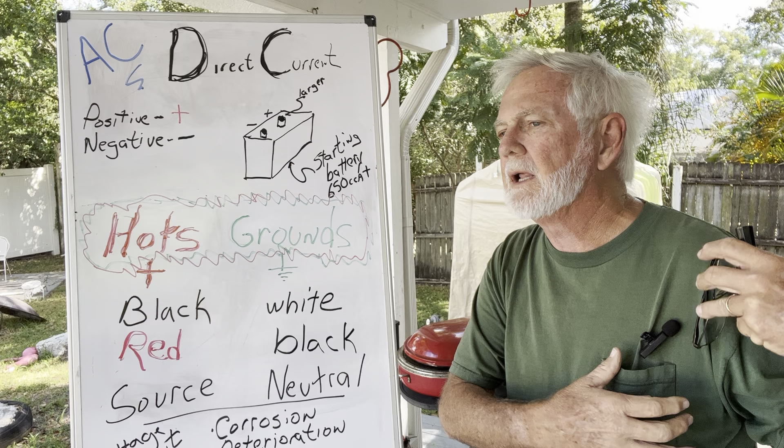For the guys following me daily, I know you're going, come on, I want to do the body pads and the gussets and stuff. I dig it, in the big picture of things it'll be fine. But during this summer season, I really found a lot of folks had problems with ground issues, corrosion, things like that. Also, a lot of you guys call and say, well, what's this wire over here, what's going on here? What I found out I needed to do was go back to some basics and handle those, then get into what the problem is.

So what I'd like to do on this video is talk about a couple of basics. Now I know you guys that are advanced go, oh man, here we go, let's not go watch this. Hold on, you may learn some things, you may see some things that maybe you always had questions of, because I want to try to answer a couple of those questions right now.

Okay, now it's kind of scary, you've got somebody that's left-handed and dyslexic trying to tell you how to go left or right, right? Anyway, that's what I want to do here a little bit, right?

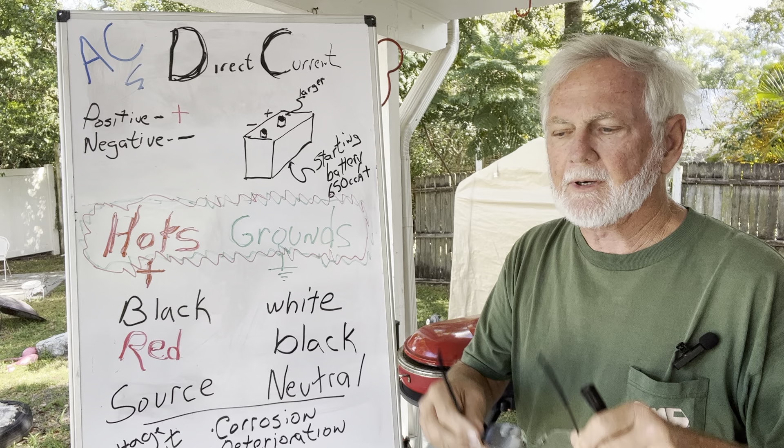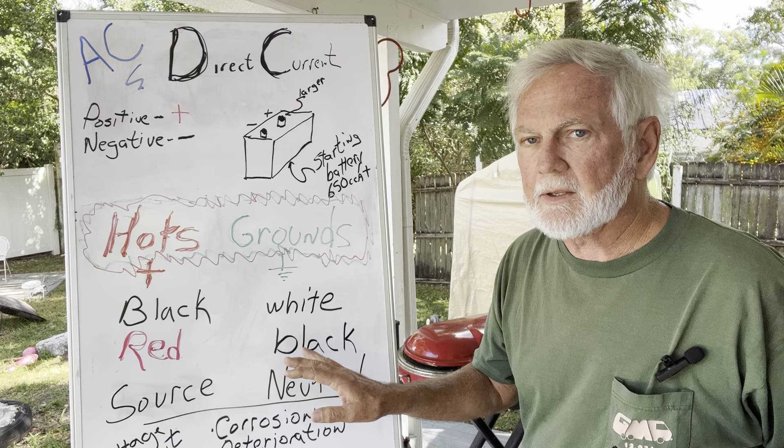Now, we're working with DC, direct current, okay? There are two basic things you've heard in life: DC, direct current, and AC, alternating current. Well, today we're not going to talk about anything about alternating current. No, sir, we're not going to talk about Tesla or all the cool stuff they did. We're gonna talk more about Edison and DC circuits a little bit.

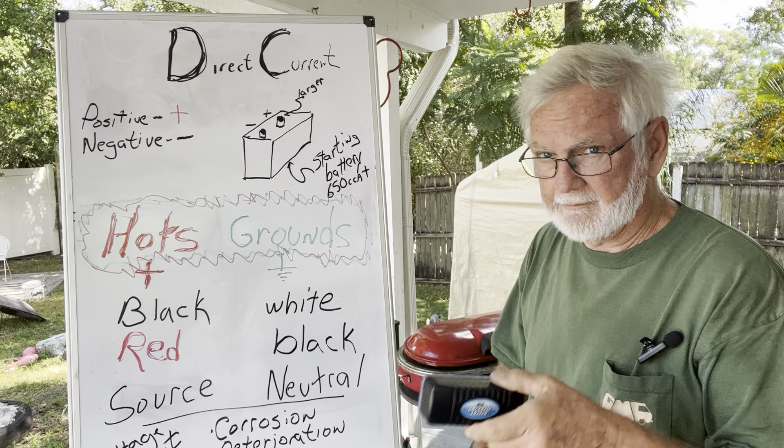Now, your coach has two 12-volt electrical systems. It has a living area and it has an engine electrical system. And it has one AC system, whether it be from your generator or plugged in. We're not going to talk about any of the AC systems at all. We're going to talk DC, direct current. Your main static direct current source, of course, is your batteries. Boy, I'm getting deep, right?

And your battery has a positive and a negative on it, right? And all of your engine electrical system batteries will be up front, okay?

There's a boost solenoid. I was going to bring one, but that's okay, we're not going to even talk about it. But down as you pull up your passenger front hood, there's a boost solenoid. It's a silver cylinder, about 1.5 inches diameter, about 2 inches long, and it has a copper lug on each side of it. Okay, that is your boost solenoid.

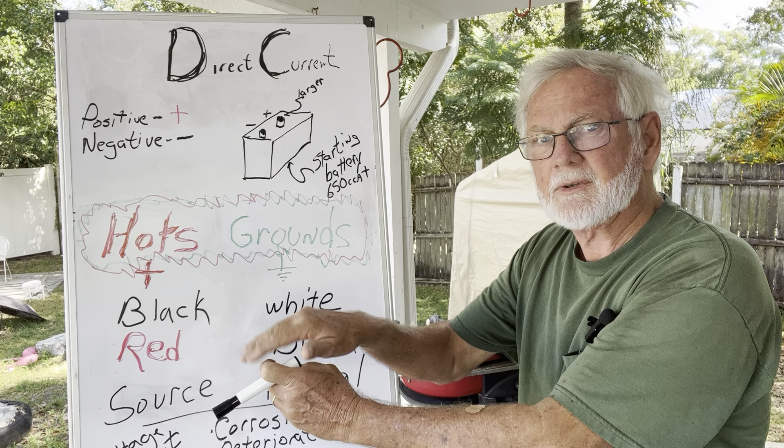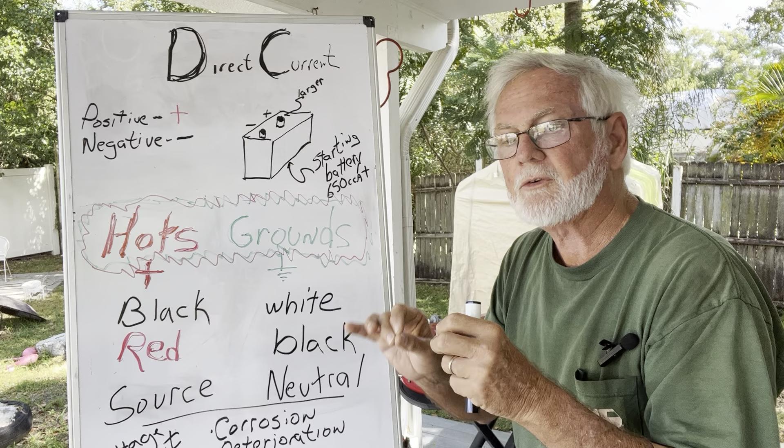Not to be confused with a Ford starter solenoid, which has a black plastic case and a silver top. It does have two things out the side, and it does have two terminals in the front, but it is not a boost solenoid, it is a Ford starter solenoid, but it also supplies the coil during start voltage and blah, blah, blah, blah. That is not what we want in this application. We want a boost solenoid.

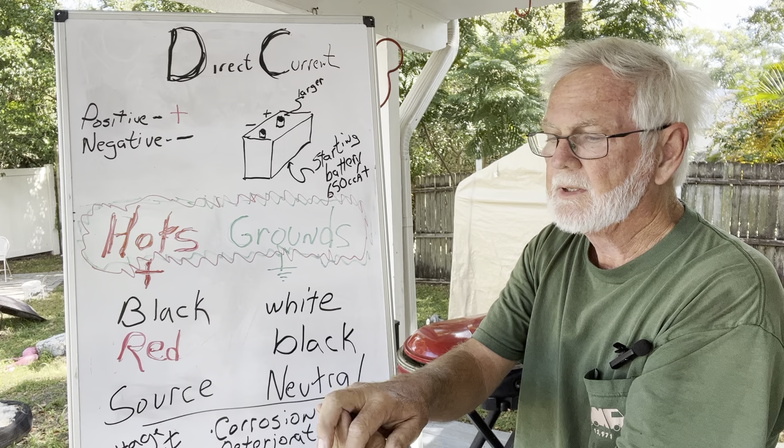So when you look at your boost solenoid, on the left side, all those wires going to that big terminal, is your living area electrical system. And the one on the right is your engine or starting battery electrical system. Your starting battery will be connected with its positive to the right-hand side, kind of looks like a cartoon character, but this battery, one way or the other, will be connected here. Now, this side is your living area. We're not going to talk about it right now. Well, we are, but not for purposes for a few minutes. So here's the deal.

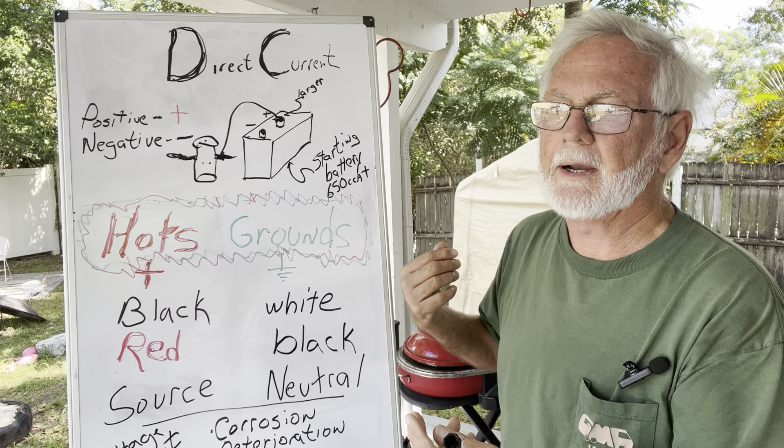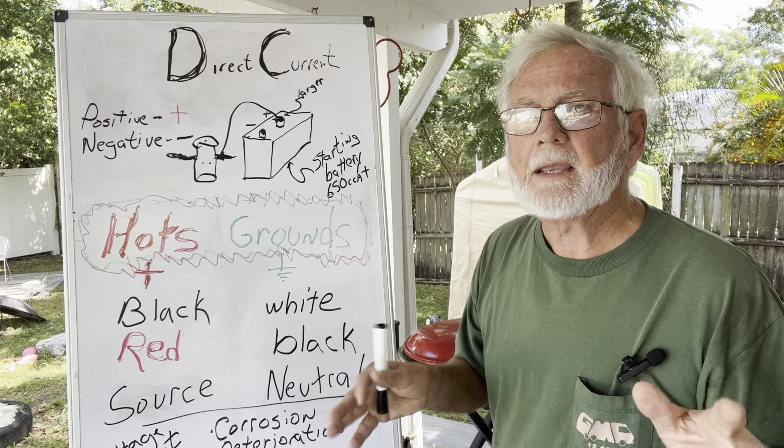There's a theory called the Holes, H-O-L-E-S, theory of electron flow. Electrons flow - supposedly the holes of where the electrons are supposed to be - flow from the negative terminal to the positive terminal because they're trying to get electrons. That flies in the face of everything that you and I think we know about things, because power is supposed to flow from positive to negative. Well, honestly, in DC circuits, think of it that way: think of your ground as negative, and think of your positive as your voltage.

Hots and grounds. Now I'm going to confuse you a bit, but stay with me. Whenever you look inside your coach, your wiring, your wad, I'm going to talk about GM floor plan coaches, and relate it to what small differences there are in the Royales.

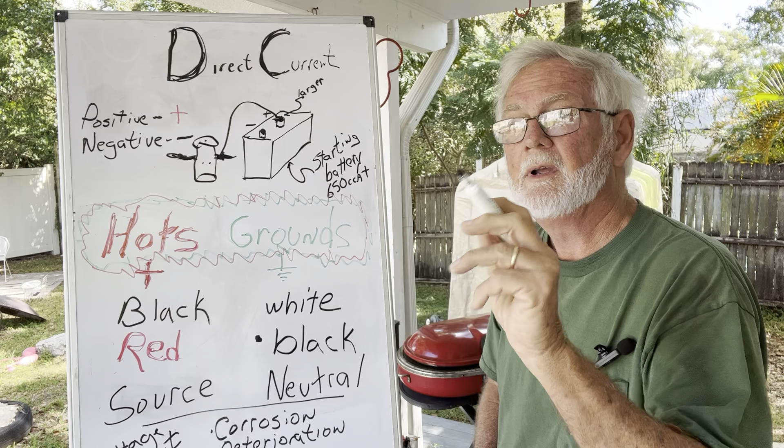If you look in your dash, the black wires are going to be ground, except for the ones that aren't. There is a black positive wire going to the fuel selector switch. On top of the fuel selector switch it's black, but it's actually a hot wire. When you push the fuel selector switch, that black wire gets hot to energize the fuel solenoid.

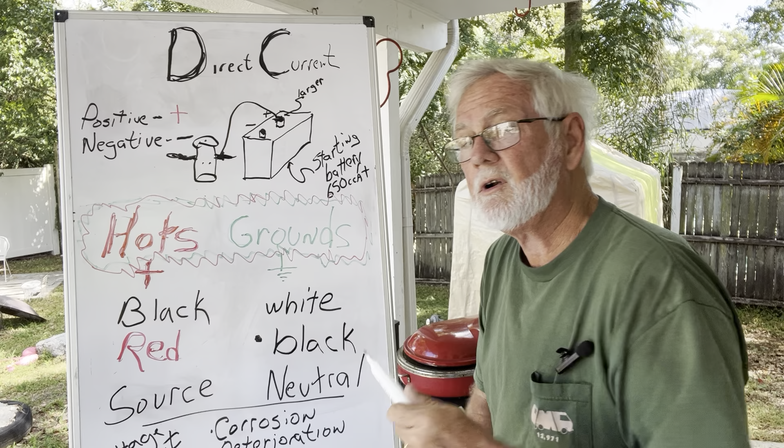But in general, automotive and your GMC, because it was built in the automotive industry, black wires are ground. Your primary wiring, the big stuff that holds current, like to your starter or from your alternator, will be red, unless somebody did their best and didn't have any heavy red wire and used black instead. Generally speaking, in automotive applications, primary power wire is red, and primary grounds are black.

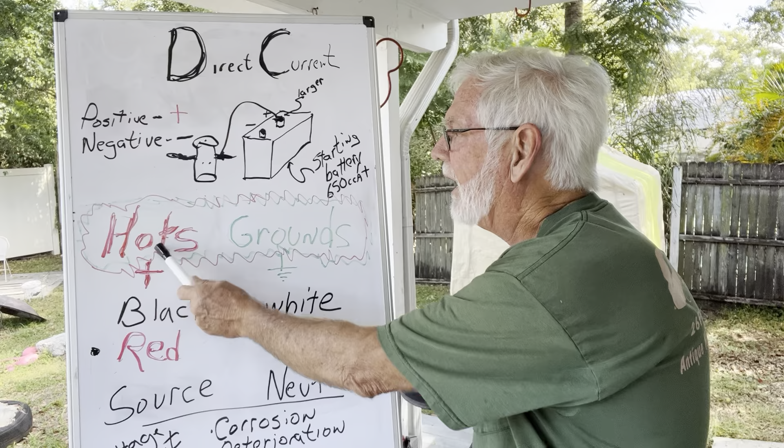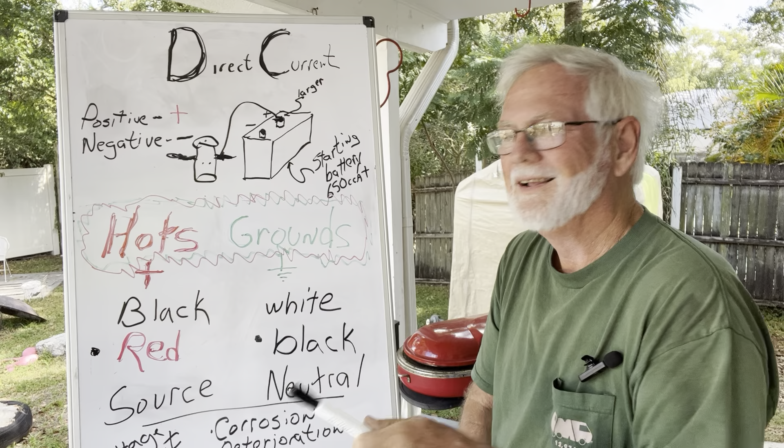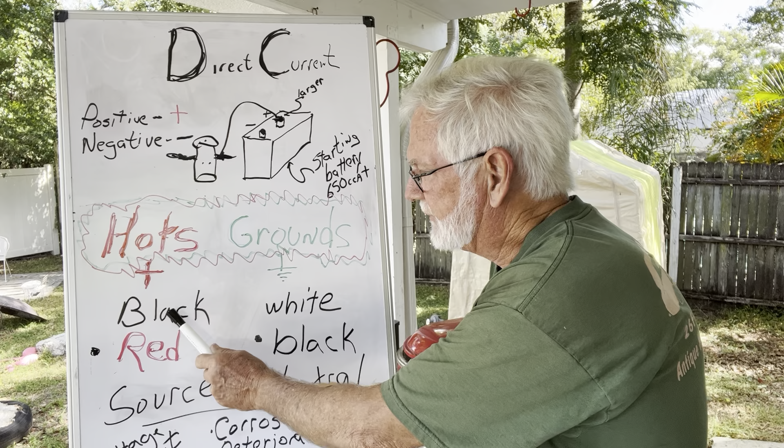If you are a journeyman electrician - my brother-in-law was one, and I had him working with me - we had philosophical differences, because in the home electrical AC world, black wires are hot, or your load, and white wires are ground, except for the ones that aren't. Generally speaking, in a house, a white wire is called a neutral wire, and the black wires are source wires for 110. So right there you can see a problem.

In the AC world, black is hot. In the DC world, black is ground. You'll buy some appliances, 12-volt lights from China, and they'll have white as ground and black as hot, because whoever designed it was thinking of home use. Even though it's 12 volts, they still carry it over, and white and black are wired like houses.

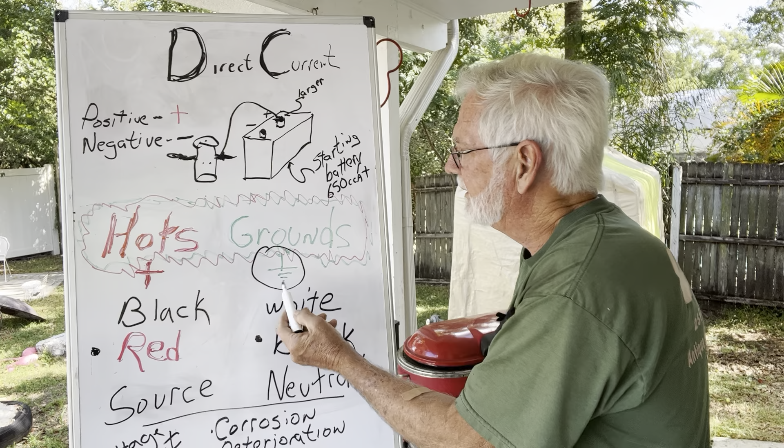Generally, if you look at a drawing, greens are going to be ground, and you'll see this little symbol - that's a ground - and of course you'll see a positive symbol.

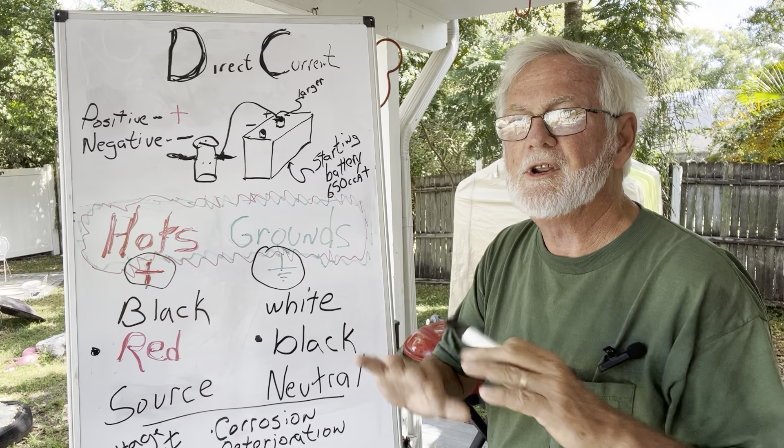Your coach is full of 50 years of good intentions. But if the guy was a journeyman electrician, it could have been wired this way - not because he was an idiot, just because he was taught color codes differently. I was taught DC circuits - black is ground to me, red is hot to me. I was not trained in AC circuits. So until I understood this, I was wiring AC stuff like DC stuff. It did work because it's just a passive circuit, but the color codes were wrong.

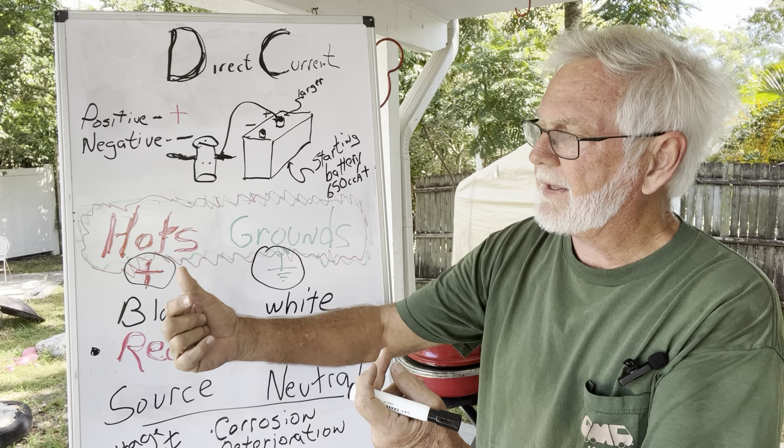On a Coachman, on a Royale, in the living area electrical system, usually under a sofa or behind something or in a cabinet, they really hit them differently. You'll see one terminal block with a bunch of white wires going to it. On Royale or Coachman or many transmodes, when you look at the living area 12-volt electrical system, all the grounds are white. They didn't have separate grounds to every light or whatever in the 12-volt system - a ground and a hot. So you'll have a white wire to a switch, then a blue, a green, and a yellow - that's three circuits, but they all use the same ground.

So the 12-volt electrical system in a Royale is a discrete circuit, meaning it has its own ground path. In a GM floor plan coach, all the grounds are common and tied to the chassis, like in a car, because the guys that designed this are automotive guys. Generally speaking, they're black wires, but the harness doesn't have a separate ground wire - they just ground it everywhere.

The next video I'm going to do will be about meters and how to find that. But right now, what I wanted to talk about is hots and grounds, as opposed to corrosion.

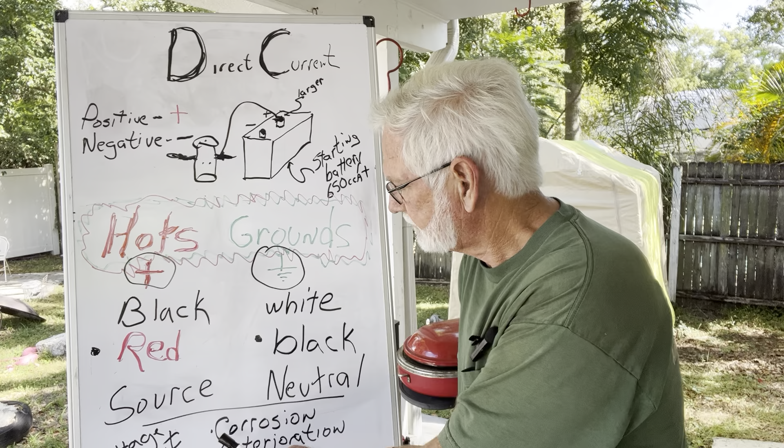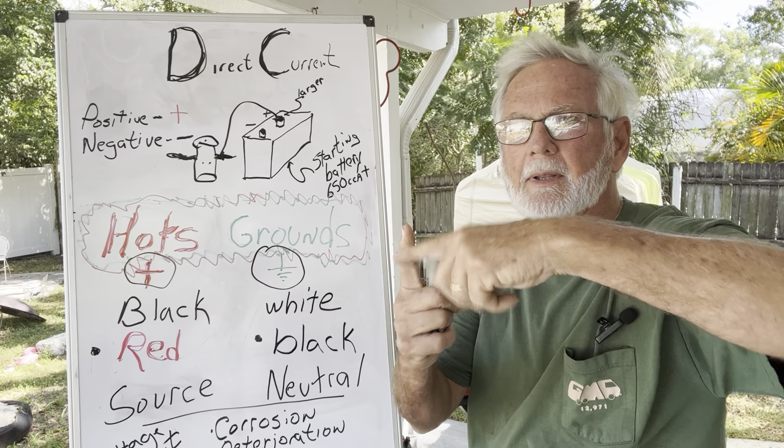Corrosion. Deterioration. Literally, something that's been made for 50 years has corrosion - it's rusted, the metal has reacted to oxygen and developed a corrosion layer. And then there's damage over the years - one wire sitting in one spot for 50 years rubbing against a piece of metal will rub a hole in it. So the three things we're fighting with our motorhome 12-volt electrical system are corrosion, deterioration, and damage, on top of all these different wire colors.

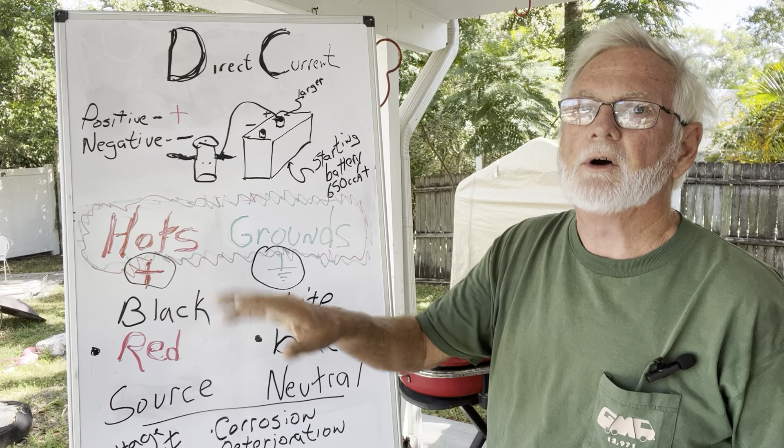The primary wiring in your coach, under the passenger front hood, the big wires - generally speaking, GM had them all red.

Generally speaking, if you want to shut them down, the way most people think - remember we talked about the holes theory - is that if you want to turn the battery off, take off the positive. Bubba, Scooter, their wives, they all think that way.

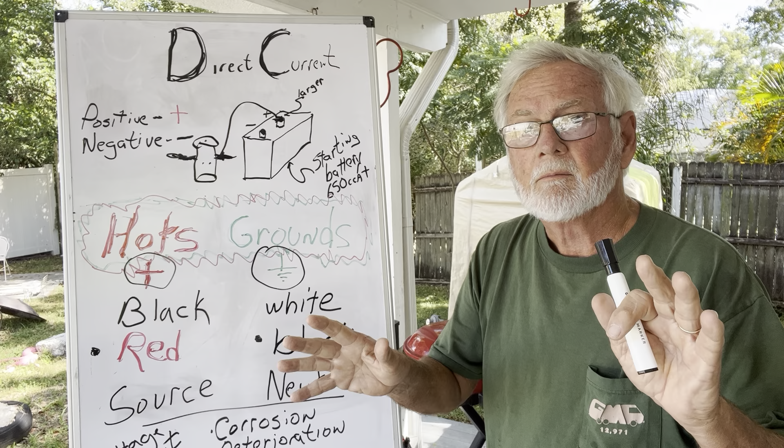And that's good. But you could just as easily do it differently. For professional use, I built ambulances for a year and a half, and Bubba and Scooter would look at an ambulance wiring system and not know what to do at all, because all the switching is on the negative side.

In the holes theory, all the current's at the negative. Well, you don't have a full circuit until you have positive and negative, right? So to be fancy or cool, or to say you knew what you were doing, you put the triggers and your shutoffs and everything on the negative side.

Don't be surprised if you go in your coach and you see a battery switch on the negative or the ground. Not unusual.

Only problem with that, to me - and I do understand it fully - is if you're in Lower Lompoc, and I know there's a place there, so I'm not down on anybody there, but if you're basically in the middle of nowhere and you get in there and somebody needs to help you, or you need to remember something, our brains in America - Americans - our thought of power goes from positive to negative.

I used to build car stereo stuff, and kids would bring their car and say, 'This thing doesn't work. I don't understand it. I used all the big wiring.' Well, they had a large power wire, but they had a little tiny ground wire. It's not going to work because current flows in - you've got to have a full current path, and the smallest wire is your maximum gauge, right?

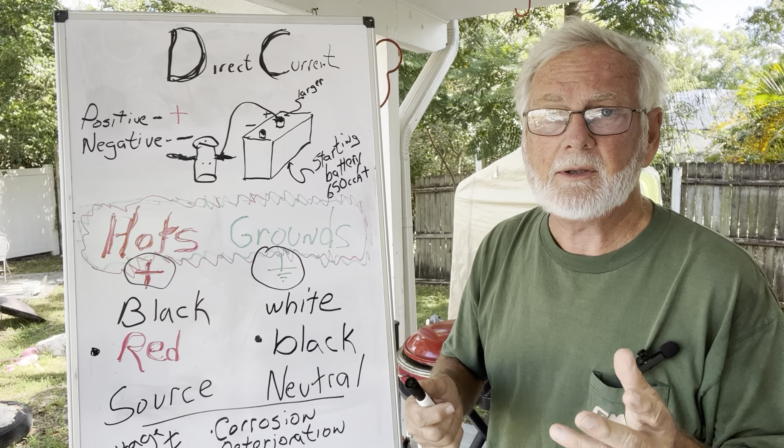I really feel that we need to put the switches on the positive side and ground all the negatives, because that's the way most Americans have done that. And if you get into the problem of what's the circuit - is it a positive or a negative trigger, this and that - I really feel to keep things simple and keep it serviceable wherever you're going to be in the United States, at least, to put switches on the battery on the positive terminal.

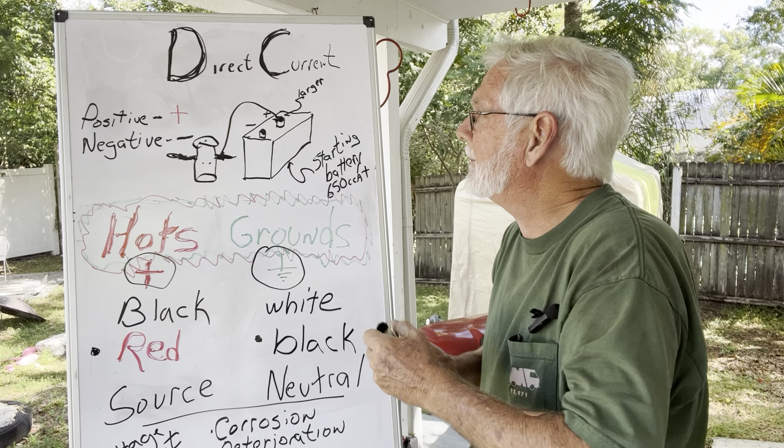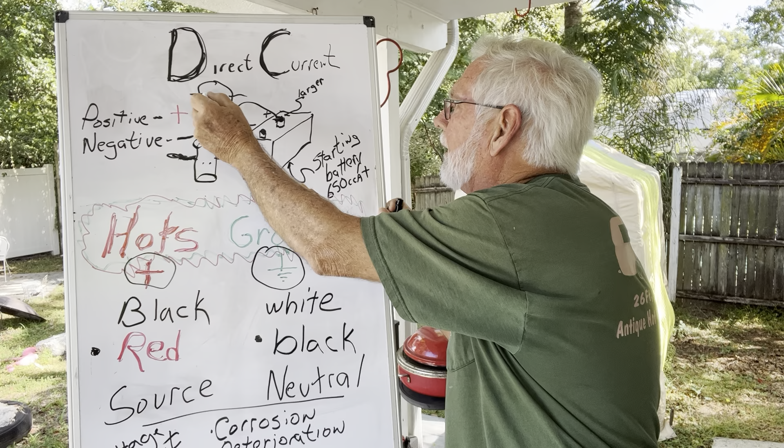Coming off the battery, first thing you do is you go into a switch. The electrical design for a switch is like that - you want to put a switch in to shut the batteries off. No matter what happens, you want to shut off the batteries. So whatever battery you have first needs to go to a switch to shut it down, and because of convenience and understanding the circuit, it needs to be on the positive side.

I said all that to make sure we didn't have any of the electrical engineers call and say, 'Look, we can shut off the negative, I like to do it.' Look, if you like to do it, awesome, super duper. But when we had the place open, we were building things for people that didn't want to remember the holes theory of electron flow and all this kind of stuff. We just put it on the positive side.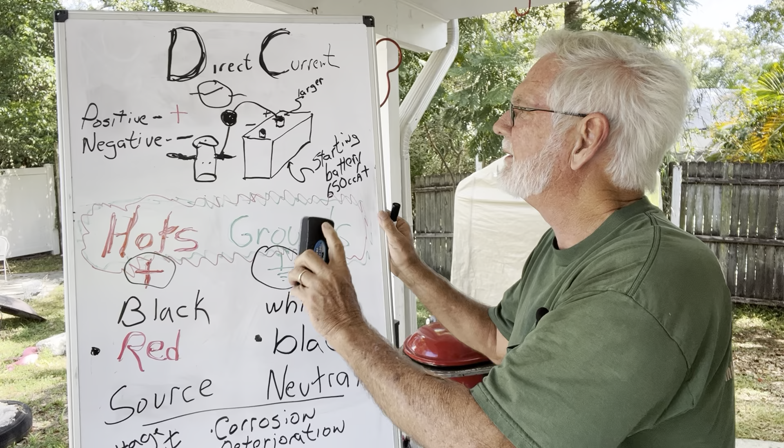Now, all of those large wires - let's forget... I don't want to forget all this, actually I'm not going to erase it right now. All of these wires have lived for 50 years or so in the real world.

All the corrosion - if you're in Florida, if it sits here 6 weeks, it's going to have some mold on it. If you're in Arizona, you know, I've seen the cartoon - the guy, a skeleton in the chair, says 'Yeah, but it's dry heat.'

Heat deteriorates plastic. What does plastic do when it deteriorates? It shrinks. So if you have a holding tank and you look under your holding tank and you see cracks with a bunch of guppy pucky all over it, that roto-molded plastic tank or ABS or some other material - the plastic has reached its half-life and is starting to deteriorate on its own. It's shrinking and it's cracking. So if you're looking to throw good money after bad, continue to try to fix that.

If you want to do away with that and worry about something else, replace your holding tank. We're not talking about holding tanks—we're on DC circuits. What I'm saying is that just from deterioration, your electrical system and corrosion will have problems.

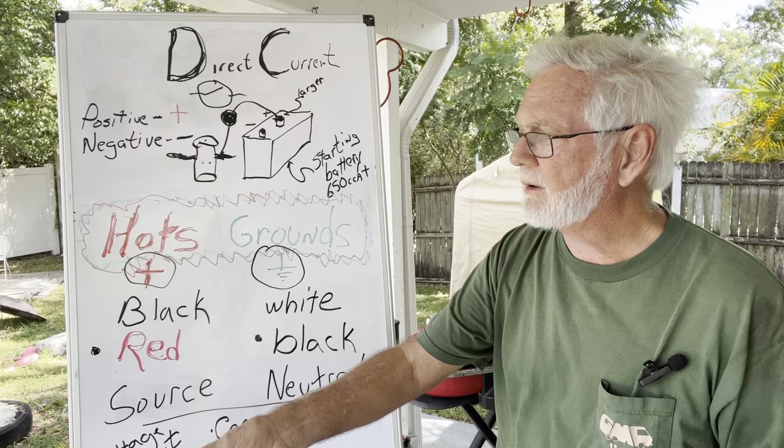Guy called me yesterday. I don't know what happened. I went out there about 6 weeks ago, fired it up, let it sit and run, all this. I haven't moved it in a couple of years. Turned it off, came back out. Now I go to fire it and it just goes click, click, click. Won't start. Battery's good. It had a charger on the battery.

All right, let's talk about that situation. A couple of things. First of all, you've had the battery on a charger. How old's the battery? Because to maintain a battery, you need to discharge it and then recharge it, because it gets a memory.

And batteries have life. You say, well, my battery is 6 years old, that thing's great—run away quickly. Because when that battery fails, as voltage decreases, the amount of current it's going to take to do the same job is going to increase. So when your battery starts to not put out 13.1—by the way, it's not 12.

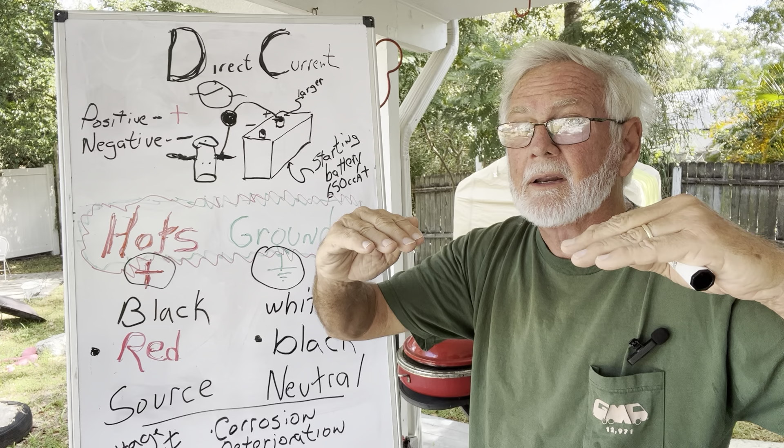12.65 is a fully charged battery. 13.1 is a charged battery with a top charge. So when it won't go up to 13.1, it'll only go to 12.8 or 12.5 or whatever—this battery's starting to deteriorate. And as it does that, the current needed for that battery to do the same job increases, which puts more load on the devices. Lower voltage means higher current, which means more stress.

So when that battery goes bad, it can take some of your other stuff with it, like the memory in your radio, things like that—low voltage. We'll talk about that again when we get on meters. But it is really, really important to cycle your battery.

Now, first thing you said: I kept the battery up all the time, and 6 weeks ago it fired right up. Now I hit it and it just clicks. Could be the battery finally said, I'm tired of this hanging around doing nothing. It may have just said, I'm not doing it. It's very possible—you need to check it.

Put a voltmeter on it and turn the key. Try to start it. If the voltmeter does not drop and it won't start, that means there's a circuit bad. If you hit the key and the voltmeter dives, voltage drops down, that battery is bad. So the first thing I told him to do is take a voltmeter, put it on the battery, and hit the key—does it dive or does it stay up? He said it stayed up.

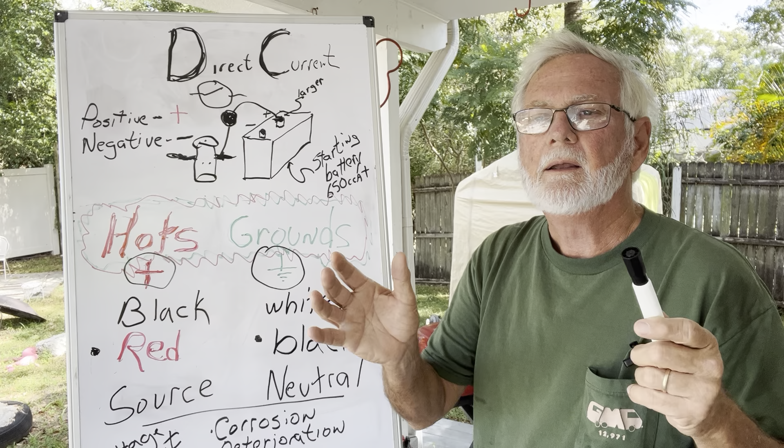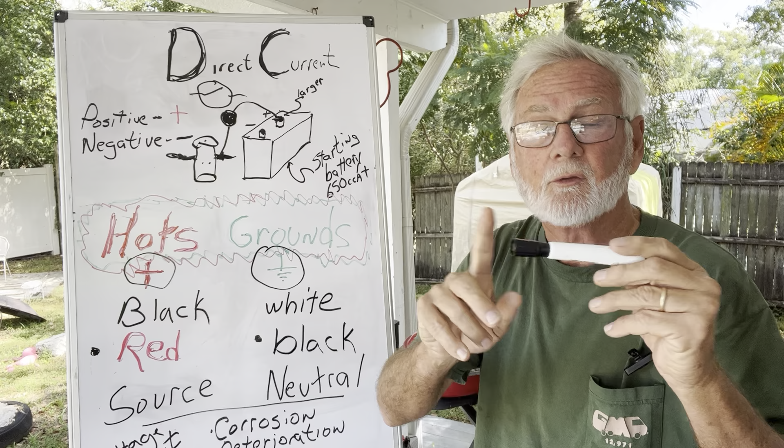What that means is one of these circuits, with all these wires on it, is not transmitting enough voltage to kick the starter, because he's got a good battery. Where'd it go? It went into the junctions of all those big wires, those red wires, 12-volt primary wires.

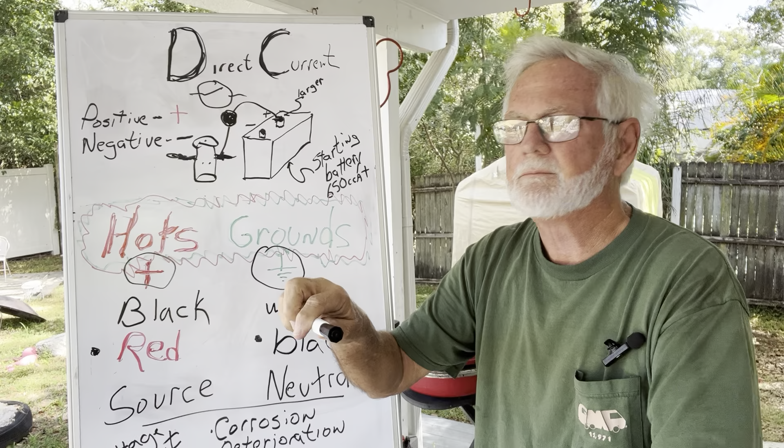What happens is you've got a bolt with 3 wires going to it, and the bolt's down tight, and it works just fine. Well, over years, the metal in those fittings develops corrosion, and it builds up a film—very, very fine, light film. It comes out of the metal. It's not like it's going to encroach into it because it's tight, but the metal itself exudes this corrosion.

What happens? Enough of that corrosion gets between the terminals and it doesn't pass anymore—it won't pass current. You may be able to read voltage through it, but it may not pass current, because the corrosion has built up inside there. Age causes corrosion. We're 50 years old—there's corrosion everywhere on that bus.

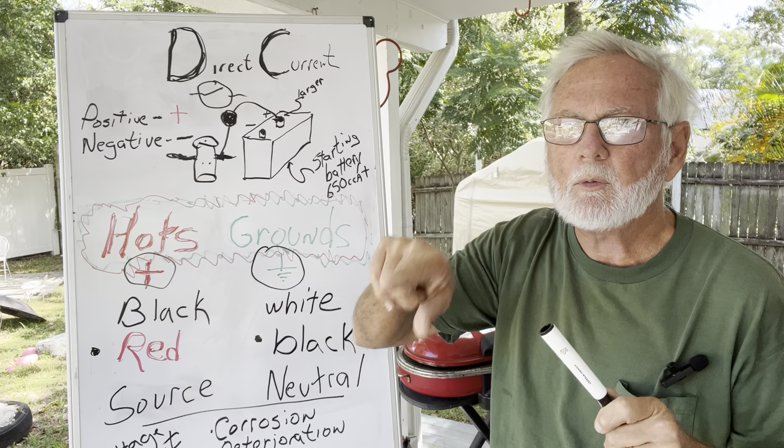Everywhere, right? Simple way: if you have a problem, you turn the key and things aren't working—simple way to do it. Get a crescent wrench, a small one, and go to every terminal where every one of those large wires is. Loosen the terminal a little bit and wiggle the wire back and forth, because doing this with the connector will scrape some of the corrosion away.

Now, if you really want to do it right, take the bolt out, take each one, use some emery paper or sandpaper on it. If you do nothing more than loosen that bolt a little and wiggle those wires around, then tighten it back down. Look at every one of the connectors going to the wires, and be sure they're not nasty or loose.

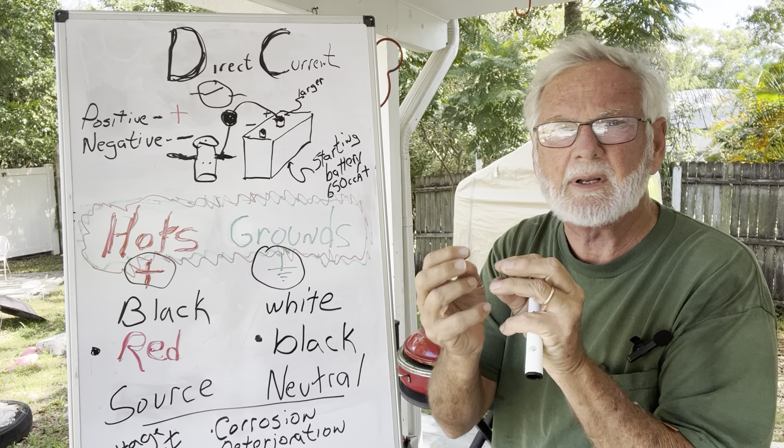You may want to go further. You may want to take the wire off and recrimp it, clean it up, every one of them, and put them back on. On the starter, there's one big wire and one small wire. Clean them both.

Look at the wires. Be sure that over the last 6 weeks corrosion hasn't built up so bad that the wire won't pass current. You might say, wire is just a wire.

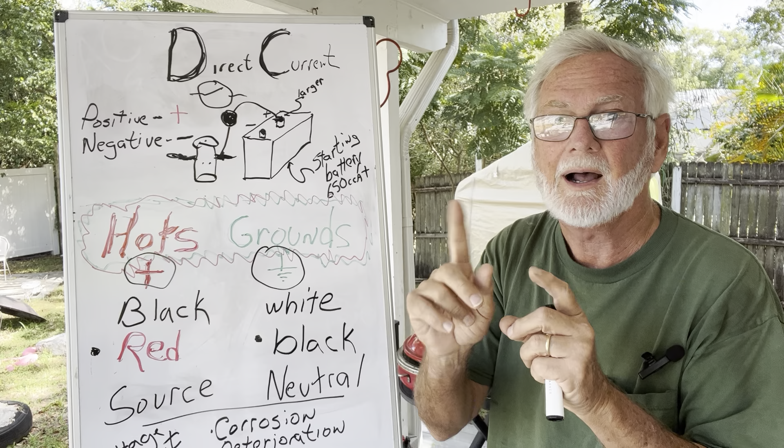But if wire has resistance from corrosion, resistance creates heat. That's the problem we have with the nichrome wire. It's a 38-inch long wire that resists the flow of current, which affects the voltage to the light that runs the alternator light and the trigger circuit on our alternator. We don't want that nichrome wire because it uses resistance and heats up, and if it heats up enough it starts to melt the harness from the inside. That's our problem.

We don't want that circuit at all. It's not that we want to put protection on the circuit—we don't want to use resistor wires at all.

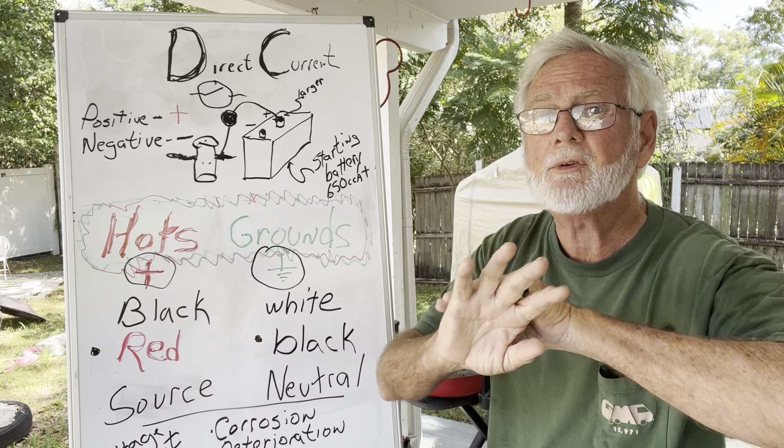That's why we're going to talk about other things. There's already videos out on one-wire alternators and all that, but let's not go there. What we're talking about is a bone stock GMC that's 50 years old.

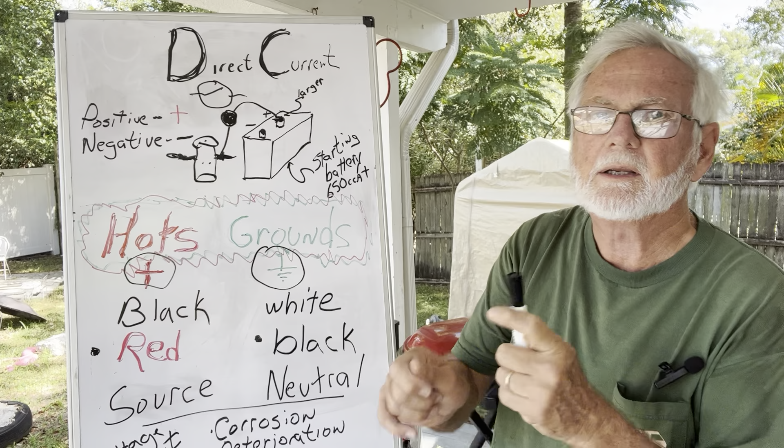Every one of those two big connectors needs to be loosened, moved, and tightened back down good. And look at the wires—be sure there's no damage.

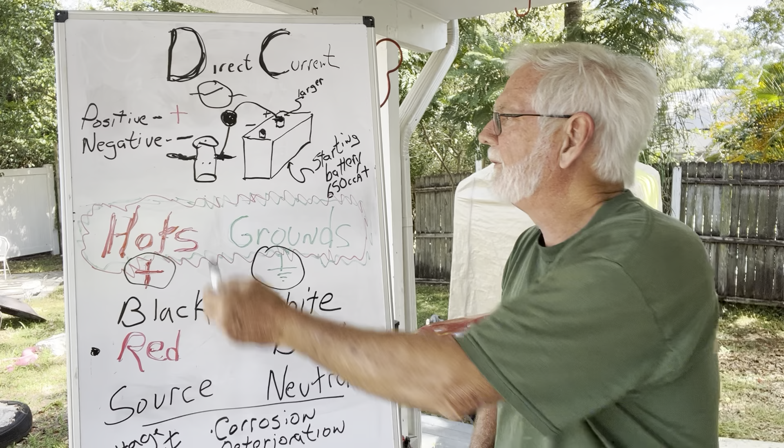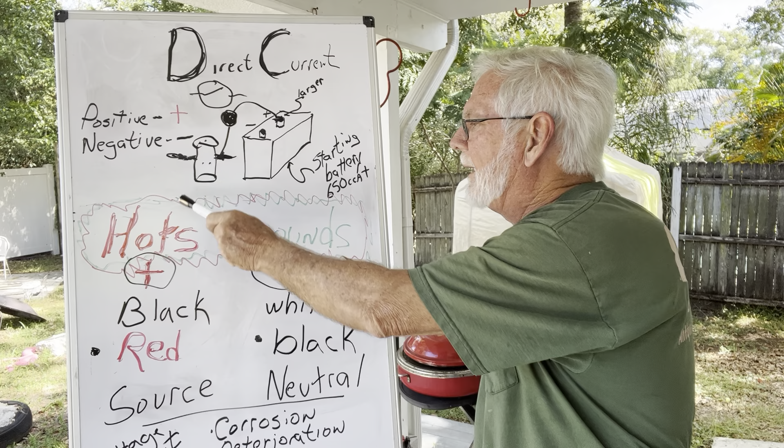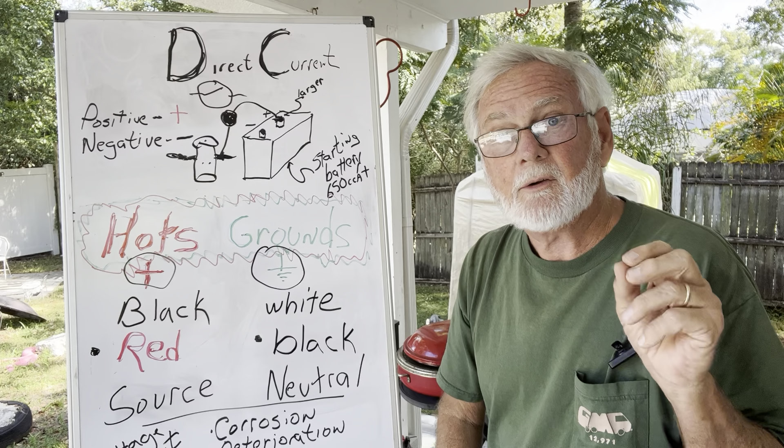There's one wire on the front of a GM floor plan, on 75 and after—75, 76, 77, 78. Remember we talked about this boost solenoid. On the left side of this boost solenoid is the living area electrical system. On a GM floor plan coach, you'll see a red wire come down and go across the front crossmember, held on with metal clips. It's a 2-gauge wire, big heavy gauge, red, goes across the front.

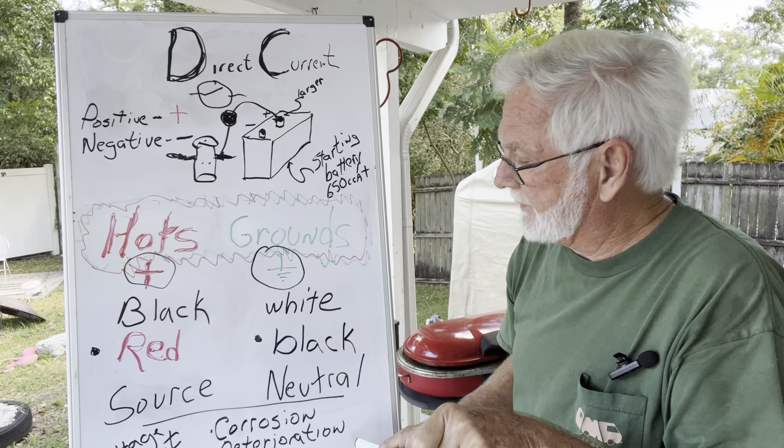It's not insulated, it's not protected. With metal clips around that wire, if the original red wire insulation corrodes, deteriorates, or rubs and causes damage, that's a dead short. Okay, a dead short.

Funny thing—if you look at where that wire goes across the front crossmember and up, just to the right of the wiper motor, it goes into the coach and all the way to the back. That wire has split loom or protection from there in the coach all the way to the other side. But on the outside, going down across the front and up to the boost solenoid, there's no protection, no insulation at all. It goes right across the front of the motorhome, and for 50 years all the dirt and junk has been getting in there.

Look down at that wire—you'll see it. If you see any cracks or anything, I know you will if it's original. Here's what you need to do: take that wire off of those metal wire clamps, and put the clamp back down.

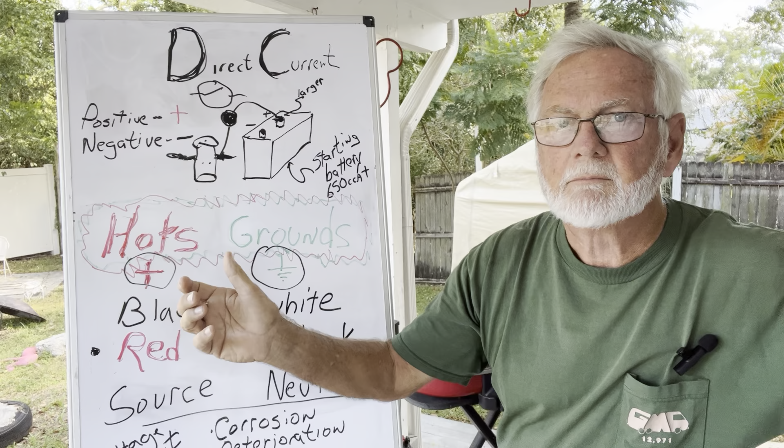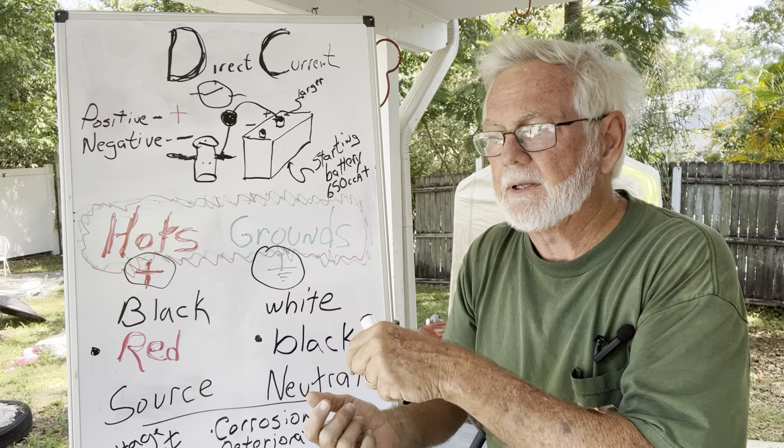Take a piece of 3/4 inch heater hose, cut it right down the middle all the way down to make a protective sleeve. Put that 2-gauge wire in that 3/4 inch heater hose, and then tie wrap that back to the original wire connector to hold it in place. But it needs to have protection on it.

If the wire is already so corroded and nasty that you want to replace it, right next to the wiper motor there's a flat spot on the driver's footwell. Put a single terminal right there on that flat spot. Take the wire that comes out of the body, run it to the terminal, cut it off, put a nice connector on it, attach it to that single terminal, and then run a new wire down and across, insulate it, and come back up to the boost solenoid.

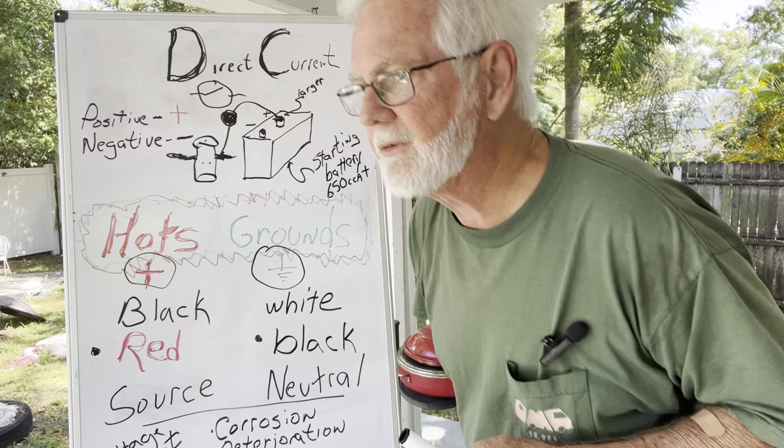Everybody needs to do this or check it, because all the GM floor plan coaches from 75 on have this wire. While we're talking about corrosion, damage, and deterioration, that wire has to be better protected than it was from the factory. At this age, it's got to be protected, or it needs to be replaced.

We're talking here about hots and grounds and corrosion and deterioration and damage. I probably should have put this at the top, but at every age, whether it's 50 years old and you've got a '73, or 44 years old and you've got a '78, whatever, you need to check all of the large wires, the primary power wires, for corrosion and treat them. Here it is at 50 years, nobody ever put any protection on it. Now you're at the point you've got to check it, you've got to fix it, but it did make it this long, so not bad.

They've got that spray stuff you can put on, and it really does work, and it is good to do. The next video I'm going to do is about the wire, the grounding, and all of the positive wires and stuff on each year.

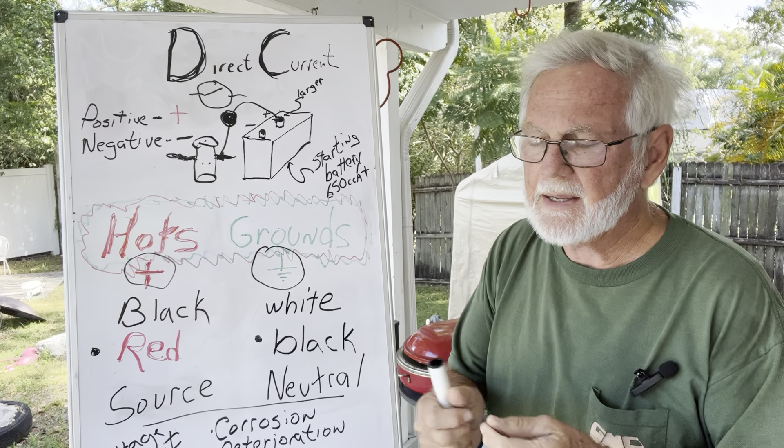Before I get to that, because in there I'm going to say this is a ground wire you need to check. The one ground wire that, as you go check everything, you're going to have to seek out. There is a mesh braided ground strap on every coach from the factory. On the passenger side of the bell housing, between the motor and the transmission, there'll be a ground strap from there over to the frame. In other words, it's grounding the motor for sure to the frame.

You need to find it. You might be able to find it from the top, or certainly from the bottom, but you need to find it. Number one, be sure it's still there. Number two, make sure it's in good shape. And number three, take the bolts loose, clean the connections up, and put it back in. Very important.

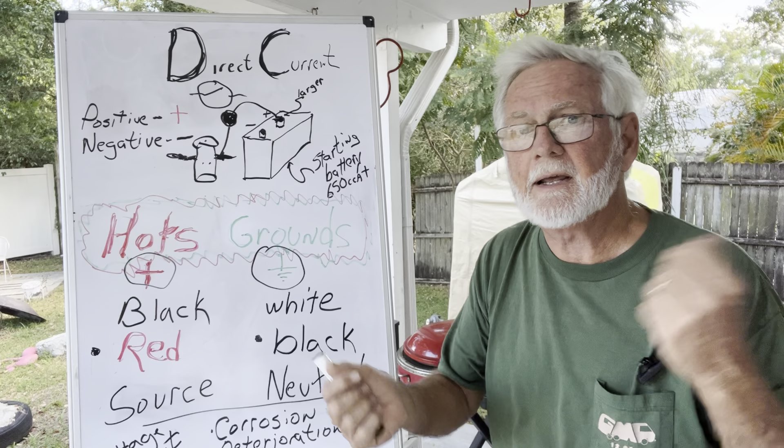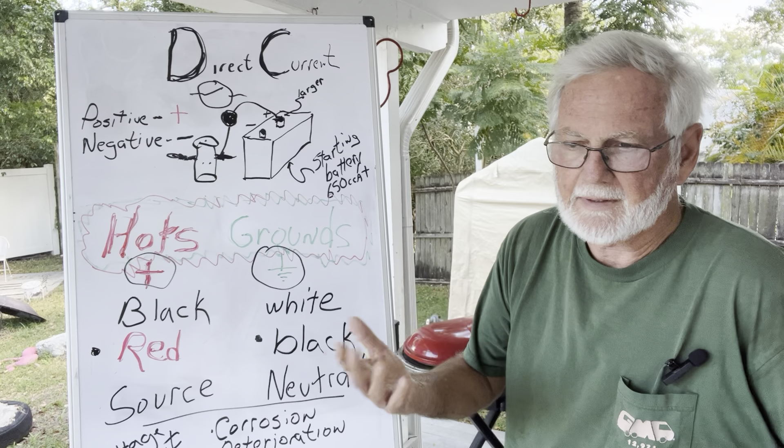I had a good friend who lives in Texas, had the same problem. He had a gas station, stopped, put gas in it, wouldn't start. Thought it was a starter. The guy at the service station helped him put the starter in. He had an extra starter, put a starter in, wouldn't start. He called me.

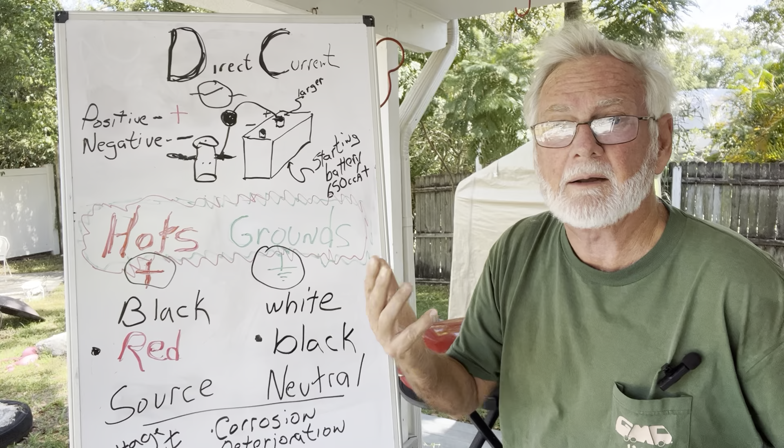I told him, go look for the ground wire. He said, well, the battery's good, he checked that, we changed the starter, we checked that. I said, go up next to the transmission on the passenger side and look for a ground strap and see if it looks good. He called me back, told the mechanic about it. The mechanic goes under there and says, it's not hooked up at all, it's just hanging there loose. What happened, somewhere in the life of that motorhome, they had probably changed the transmission, took the bolt out, put the thing to the side, forgot to put it back on. That thing, since that time, had been finding a ground somewhere else. It was working, but it did not have the ground strap on it like it was supposed to. So he put the ground strap on, fired up, went on home.

He said, you're a genius. No, it's just that I've seen this happen before. I've seen those ground straps get so nasty that the pinch on each end of the connector lost connection. So along with all these other wires up front that you're going to loosen, wiggle, and put back, find your ground strap, find your motor's ground strap, and be sure it's connected.

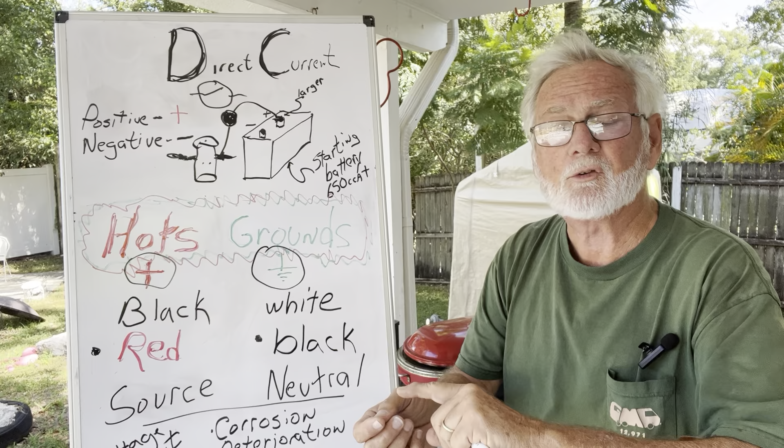Also, from your engine battery, from your starting battery, right from the top of the battery, from the connector, there should be a 12-gauge ground wire, and it should go up to the aluminum plate in the passenger front hood.

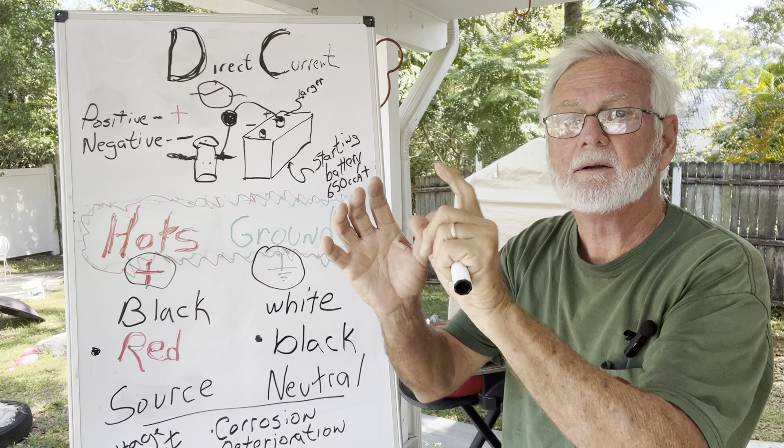Yeah, I see you, Jeff. We're calling, I'll call you right back.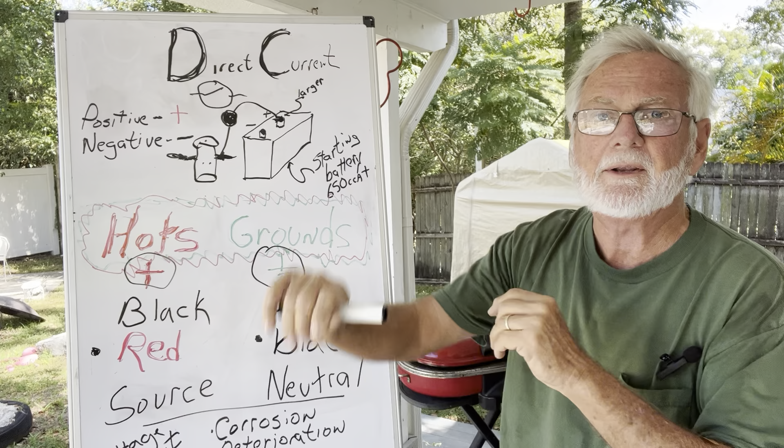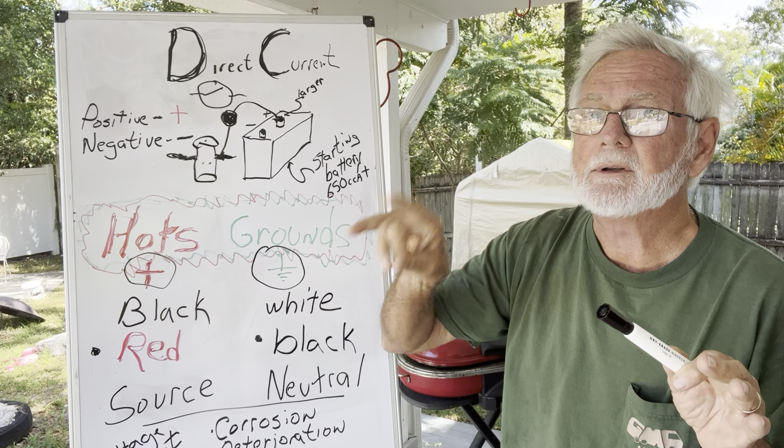A lot of times people will replace that ground wire and say, well, what's this thing? We don't need that, throw it away. But to ground the body to the battery for all of the gauges and all the 12-volt stuff, it wants to have a ground right from the battery right to that aluminum plate. If you don't have that, you need to add it. While we're talking about primary wiring, that is a very, very important wire to be sure is there and does its job.

You go to a mechanic and say, well, this thing's got a problem, I don't understand. He may not be able to figure it out either, because he's not used to looking at a 50-year-old vehicle. He's trying to fix anything that walks in the door worth enough for somebody to bring it to a mechanic to get fixed, and chances are it's not going to be 50 years old.

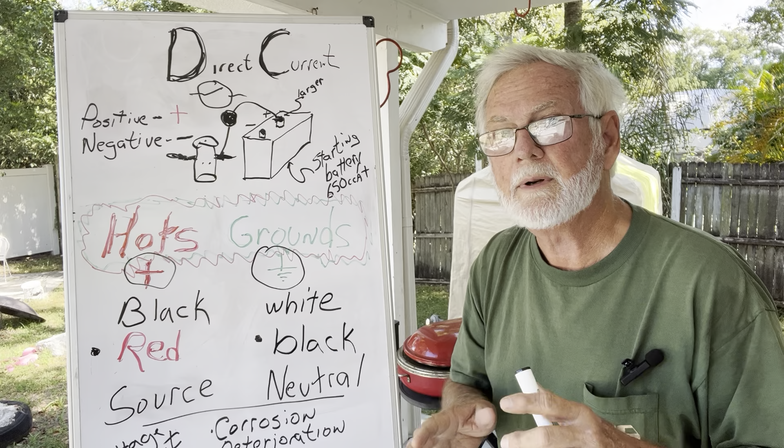There are issues that a normal mechanic may not be accustomed to looking for, because that's not what they've been used to working with. This motorhome has unique problems, ghosts in the machine, because of connections, corroded wires, damaged wires.

Deteriorated wires. So if you want to do something, instead of just sitting there admiring your coach and it looks good looking back at you, say, yeah, we're bad. Go get a wrench, get a couple screwdrivers and things, and go to every ground, every hot primary wire, and clean them all up. Look for your ground wire to your motor.

There should also be a ground on the generator. When it slides out, well, where does it get ground? Sometimes there's no ground on it, and it's getting its ground through the balls of the slide. It needs to have a good solid ground. So go back to your generator, pull it out, and see where the ground is.

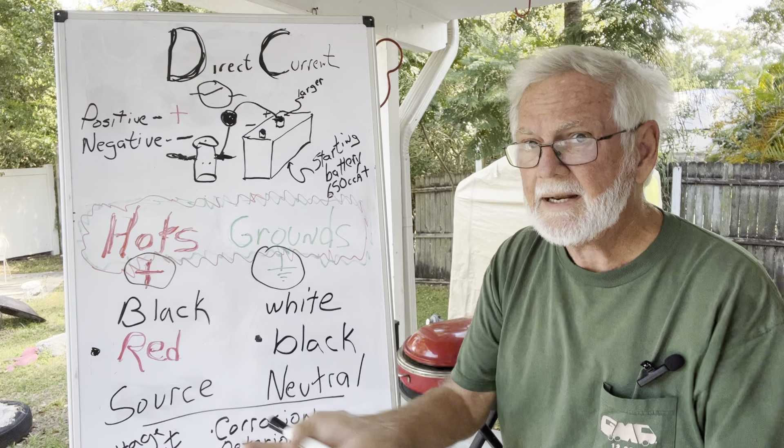You look in there and say, man, it's a chocolate mess in there. Go get some Easy Off, spray in there, clean it out. Look for your terminals, your power terminals.

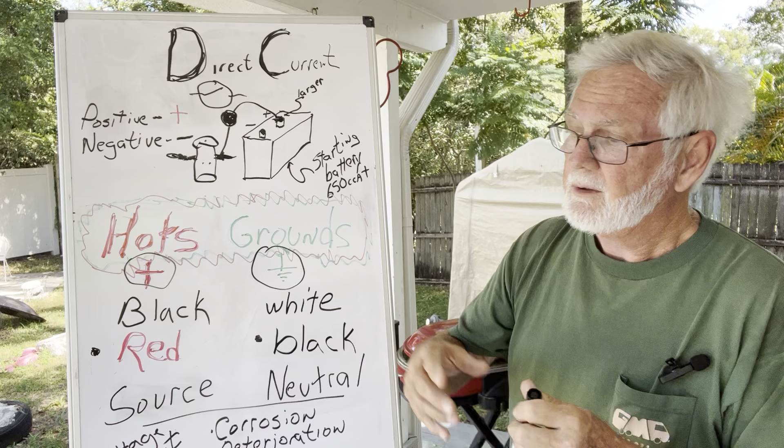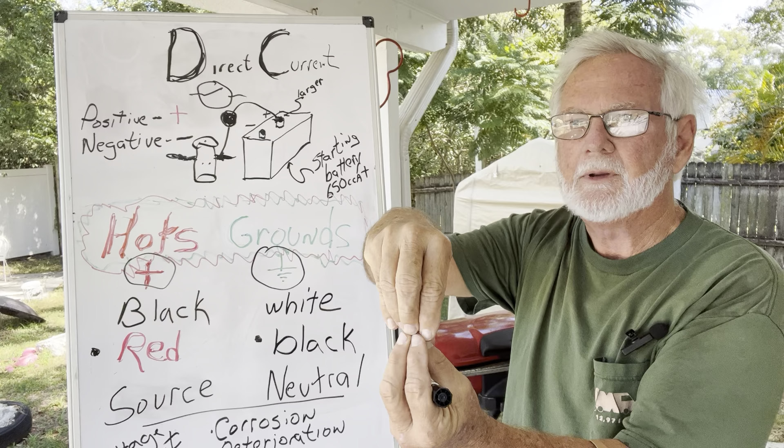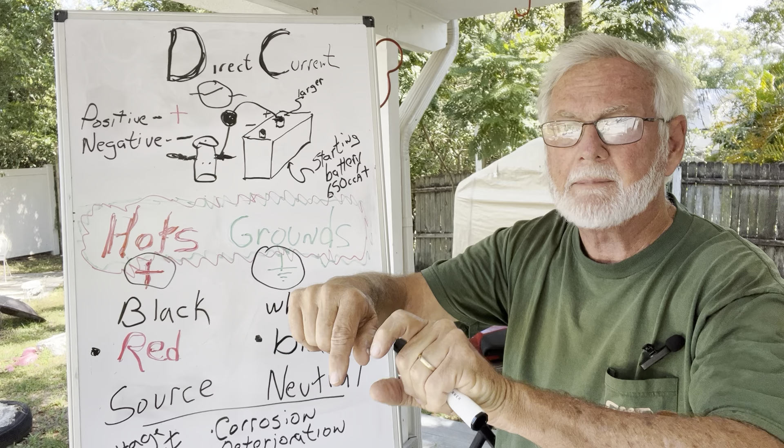There's another one on your generator, on the side where the starter is powered, 12 volts. It has a wire that goes through the metal cage and has a washer that insulates it from the metal cage. It comes under the top, it's got a bolt with a wire, and comes out the bottom of the bolt with a wire. It goes through the grounded metal cage with this unique insulator.

Get down here and look at that thing, see what condition that thing's in. Take the wires off, clean them all up. But if that insulator is looking kind of rough, you may want to think about changing that idea of running through that insulated part.

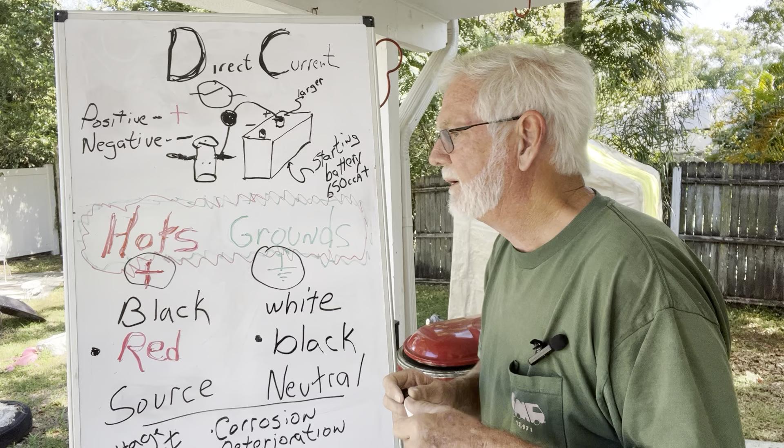Do it another way. Now it's got to move back and forth, but remember, it's got to have a good ground, it's got to have a good power wire. So see what you can do to get it to do that, and maybe get rid of those through-the-cage things too. If you do all these things, the ghosts in the machine, things that happen and you don't even know about, may go away, right?

A little bit of a long video today, but I've got preparation.

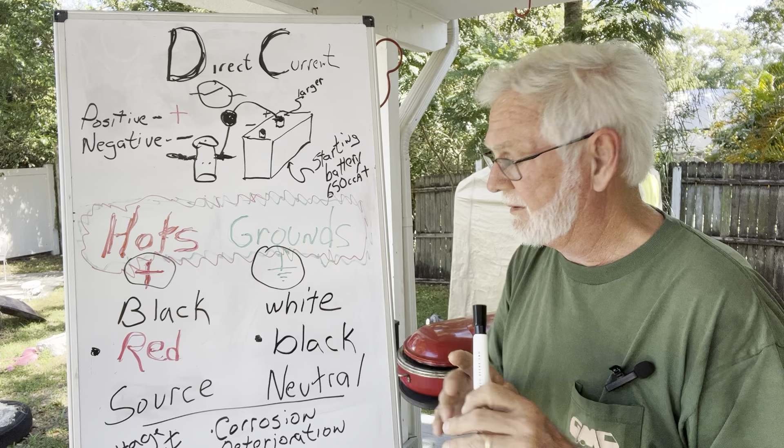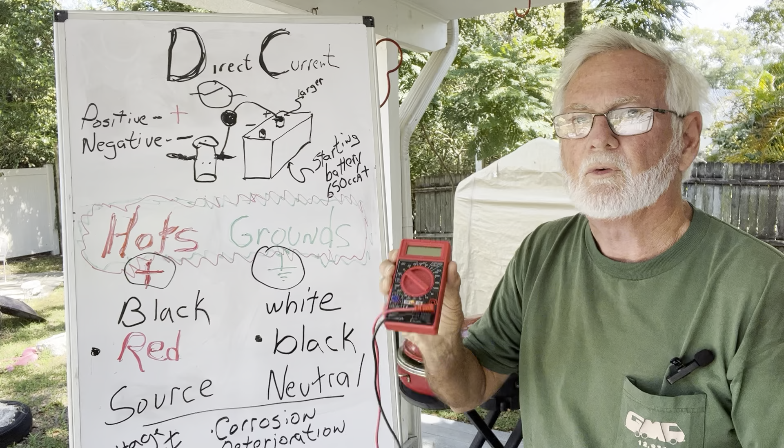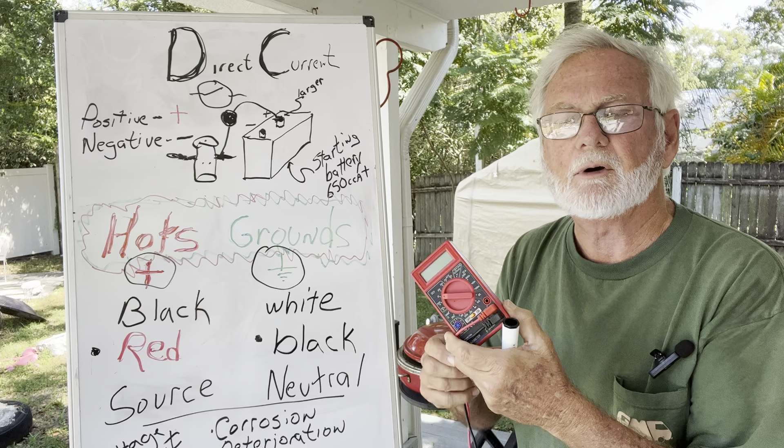The next video I'm going to do is how to read your voltmeter. People might have it fall down here - the infamous Harbor Freight red voltmeter. We're going to talk about this thing, talk about how to use it. Everybody should have one of these. I mean, they're like $5 or $6. They used to give them away, but I guess it got a little bit pricier than that. But everybody should have one of these. If you don't have one of these, run out today and go get one. And we're going to talk about how to use this and how this came to be, why it's important to you. So watch that. We've got some other videos that'll be in our database along with this.

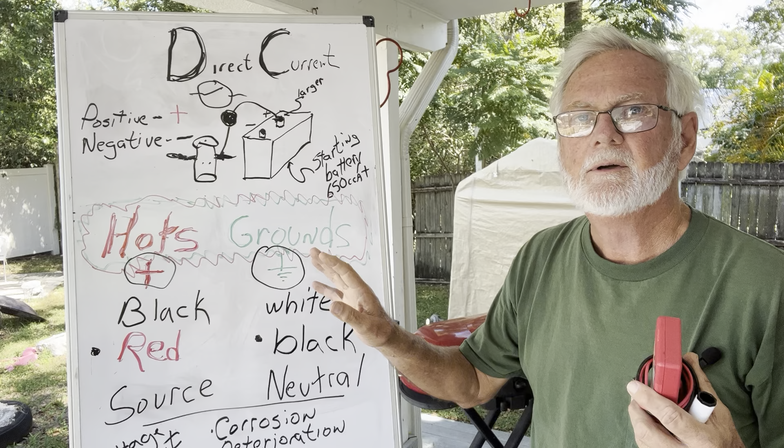Takeaway here is go clean all your connectors, all the wires, all the stuff, and get rid of corrosion. Look for damage and look for deterioration.